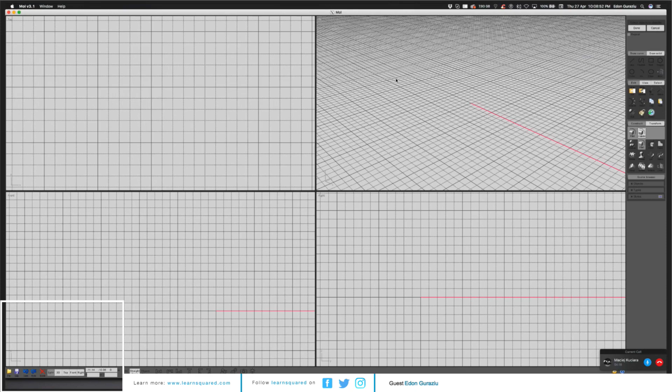What are you trying to say here? Are you trying to say you have to have an operating system to install an application? That is insane. What kind of claims are you trying to push here, dude? Listen, wait, there's more. Oh no, there's more. Are you serious?

All right, I want to know. Basically dude, what you do is like the way I do things in general, right? If I'm introduced to something new - and back in the day it was like MoI, I never heard of it - I installed it, and the license was cheap as fuck by the way, so I instantly bought it. No need for piracy, let's get that clean.

And basically, you start screwing around a little bit in the program, and if there's something you don't know, what do you do? You don't go to other artists and be like 'hey, what is the magic website or magic resource I can use?' Huh? No, dude. No, you got to do it the hard way, man.

So you go to YouTube, or you go to any forum or website, and you Google it. Or is it too complicated? I know man, but listen, hang on - okay, I want to know, I want to know. Like, let's say you can't figure out the filleting, right, or the chamfering - you fucking Google that shit. You find a couple of videos, you watch it, you try and apply it to yourself, and you have learned something that'll stay with you forever.

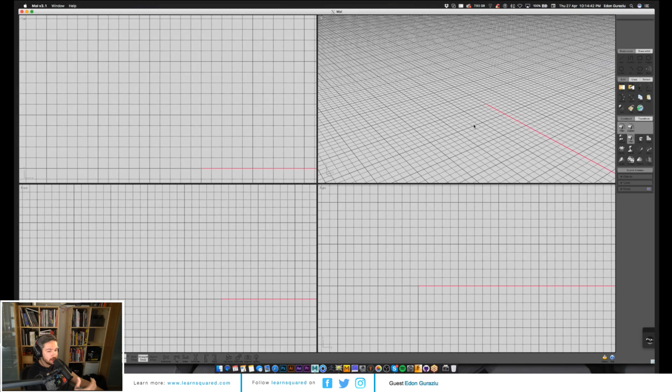So those things are very easy, but then the more complicated things you want to do, the more effort they take. If you want to do some really complex operations on your solids - like some cool shapes, bend, or whatever elaborate way of modifying the surfaces you already have - it takes a lot of brain power and clicks to get there, you know what I mean? And there's always some small thing hidden here and there, but it's not like there's a hidden tool that I don't even know about.

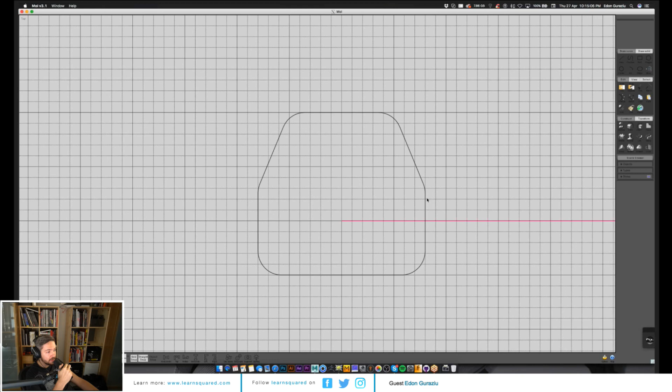Compared to MoI, it's exactly the opposite. On the surface, easy things seem convoluted and fucked up. It's convoluted to start and understand - it's almost like feeling like you're starting with ZBrush, basically.

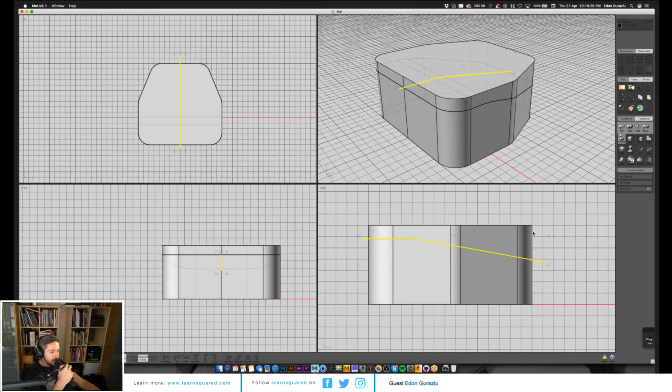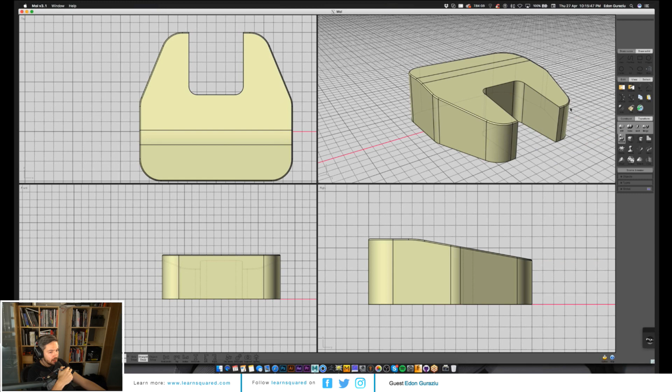And you don't even know what the hell is going on, right? Dude, it's crazy. But then you realize there are actually shortcuts you can script, and you can pretty much shortcut almost every single operation. Like, almost if not everything can be a shortcut.

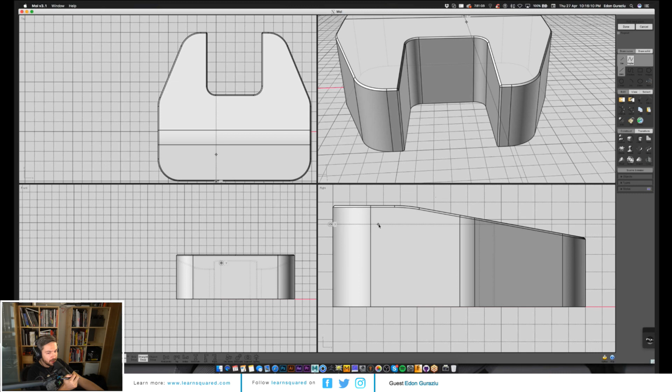I was having an interesting discussion, and we had Vitali on one of the last streams, and I had an interesting conversation because I asked him a couple of questions. He said, 'Hey, if you right click, it's like enter.' I'm like, are you shitting me, dude? Why is it not written anywhere? Like, nowhere is it written. Some things are not communicated.

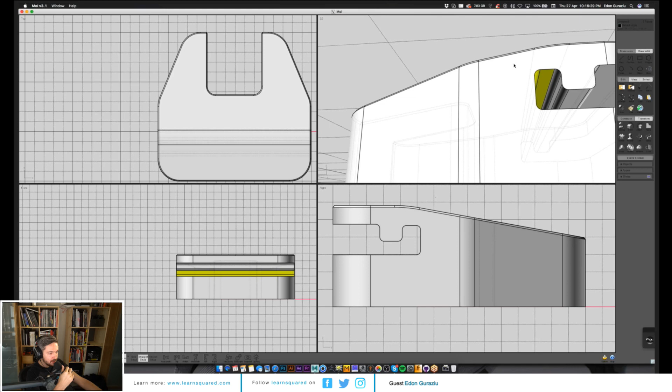Yeah, and like I asked you about shortcuts. You sent me a list of shortcuts, and that's pretty easy to find. But I've quickly found out that some of the operation names displayed on the UI are completely different than the script itself, like the script that you have to put in to tell people, okay, this is...

Yeah, it's easy, but then for instance, flow is the easy one, but there were some scripts you have to manually put in, etc. But like mirror, you can assign any key you want, like Command F or whatever, you know. That's great, yeah.

Exactly. But for instance, if you go to - I can't remember what it was, I think it was freeform constraint curve, or through points. Through points is an interesting one - it's not actually called through points, it's called curve constraint or something like that, which is a completely different name to what you see in the UI. And that's the confusing part.

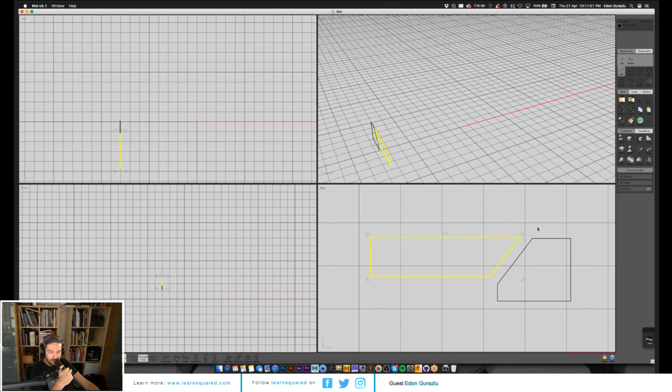Have you ever used Flow? I don't think so, dude. Oh, see, there you have it, I know something you don't know. Oh, really? God, damn, that's fine. So Flow - you know what the FFD box is, right? Of course. So Flow is that, but it's working in one dimension. So you basically, the way you do it...

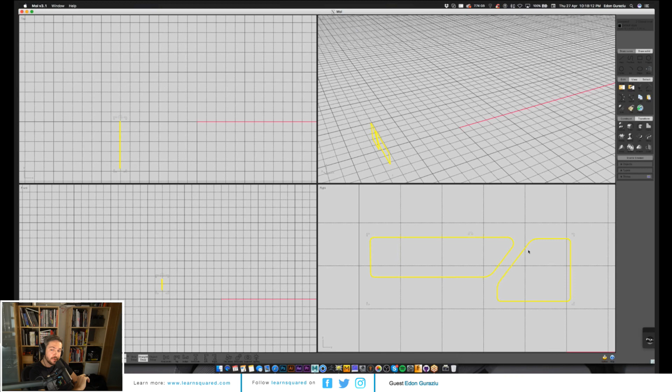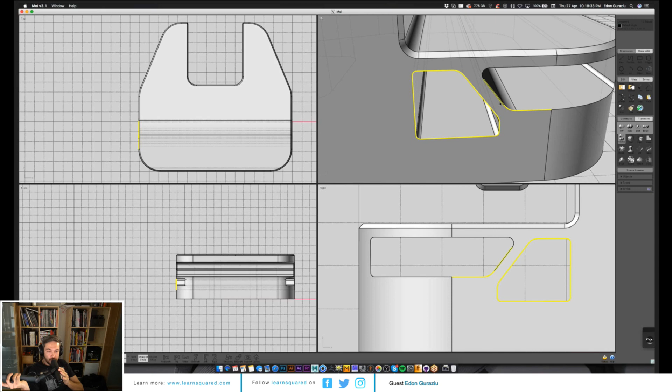So for instance, you have this model right now that you're working on. Go to it, now I'll show you. See, I teach Edon. Like, what the fuck? Teach me, yeah, I'll teach you. I think it's called polygon, not rectangle - it's a polygon. In one of the views you just have to draw the polygon behind. I'll maybe share my screen and show it. Yeah, please share yours so I can see it. Let's just do that, that's gonna be easier.

I need to find my mouse on the screen. Alrighty then, can you see my screen, dude? Yes, perfect. Let's make sure that people can see it too.

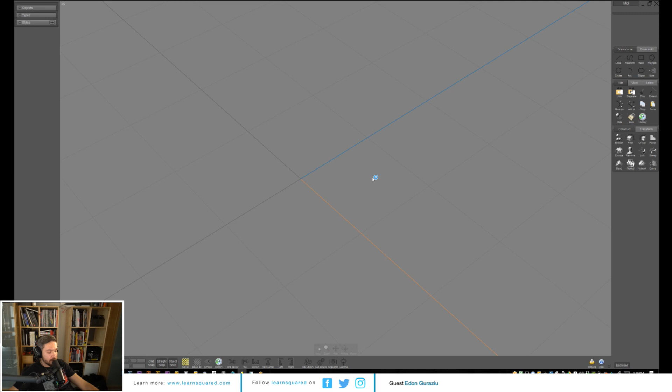So my UI looks different. I actually want to talk to you about UI, that's another topic. I was bugging you and you were telling me, hey, there's millions of scripts and plugins that you can find. I went with Chip Walters, I believe, yeah, the man. I'll maybe pull up this channel on YouTube that he has in the meantime, because someone might ask, hey, how do you set up your UI and whatnot? So guys, if you go here - if you go to this channel, it's called Chip Walters, CWALTERS56.

So, go to playlists. He actually has 3D code, some small tutorials which are pretty cool. He explains how to set up your Moi, your shortcuts, and your custom UI. If you dig deep enough, you'll find exactly what to do. He also has his own application that he's built, a GUI builder, and you can use that to set up your own colors for pretty much anything in Moi. That's a really good resource. I'm gonna paste in that link, and he teaches basics in his videos too. So go ahead, use that link, and it will teach you what to do.

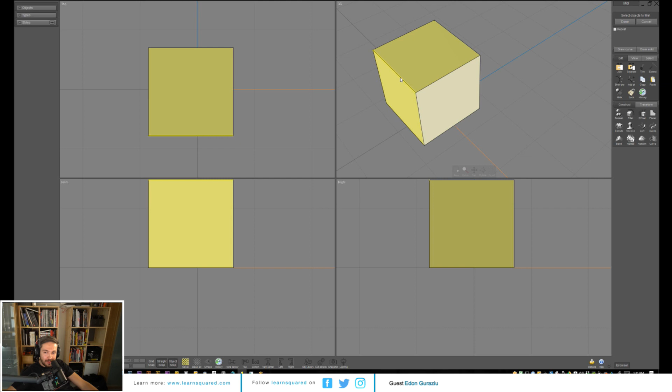Just do a little fillet. Like this should be good enough for us. Another thing is, if you right click again, it repeats the same operation that you did before. Very good, which is great.

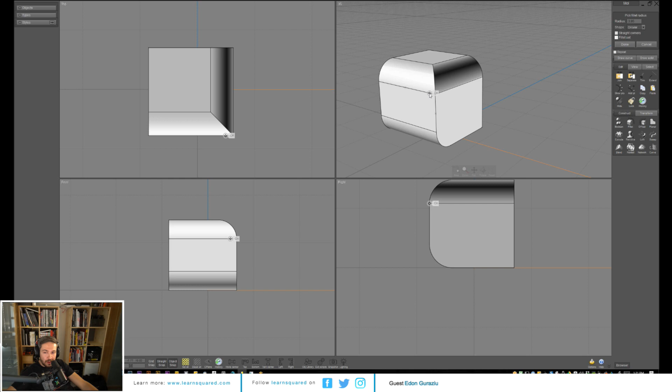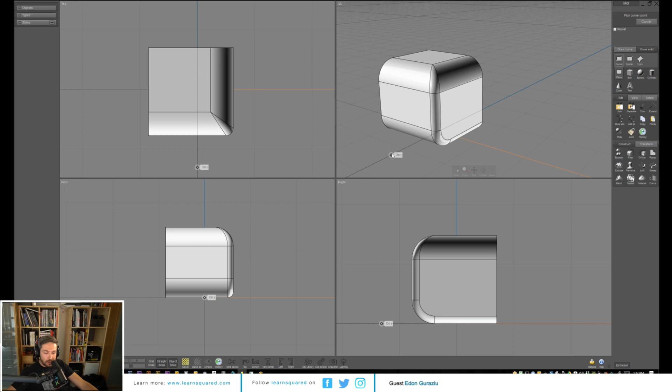All right, so I've created this object here, right? So what you do is go to draw solid, plane. I think it was plane, corner to corner. So you draw something like this behind it, right? And then you take it and copy and paste, so you have a next one here.

Then you go to construct, or transformation, no - here, in edit, add points. And when you hover on the surface, it shows you different points. So you click it, and then you can select those points and move around, basically deform the surface. So we did this weird deformation right here.

And so the way flow works, it's basically based on the axis of those two surfaces. It will try to deform the object, and that could be your whole assembly even. So this is great. If you go to deform flow, you click the object, right click to confirm the selection.

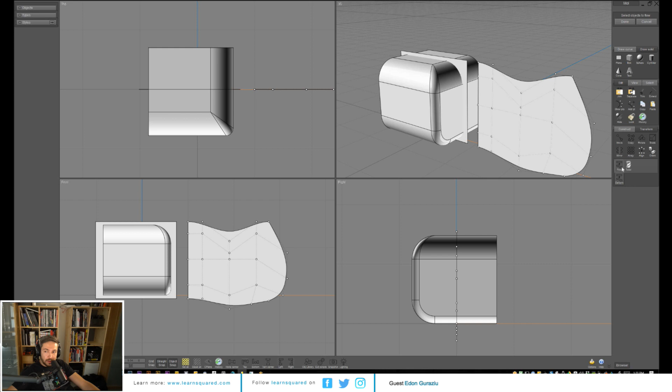And then here's an important step, and I was struggling with that, so Vitaly showed me how to do it. And then I tried to do it, and it just didn't work. So I pinged him again, like, hey, how do you do it? And he said it's very important - you have to do this and that.

Where you click your mouse is very important. It doesn't matter where you click the first time, but you have to click on that surface behind it, the one we just drew. So if I click right here in this corner, that means the next time I click to confirm the surface I want to map to has to be a similar corner. Otherwise, it will flip it or do weird stuff.

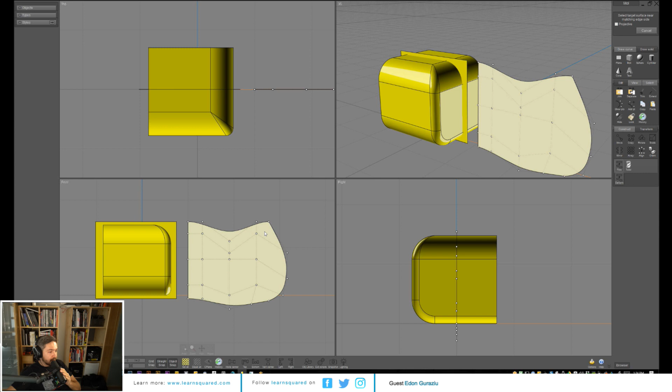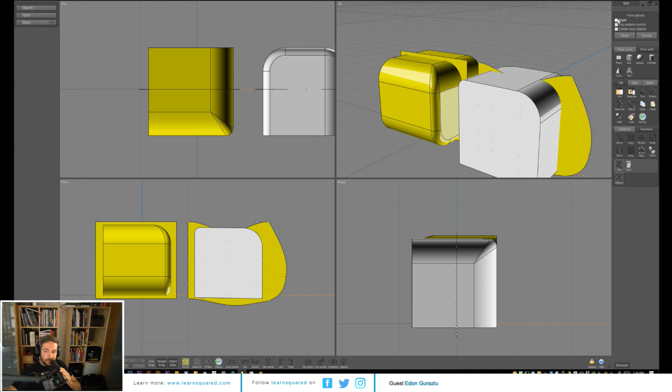So if I... you see what happens? Now this object that I've created became this bent, cool looking surface that is basically following the deformation of that box that I've created. And then you just confirm. But also you can make it rigid, which lets you create a lot of stuff like that. You can flip the surface normals, and you can also delete the old one. So that's something you don't even know exists.

And that's my major gripe, major issue with Moi so far. There's so much good stuff that you don't even know exists. But either way, I oftentimes run into issues, and I want to show you something that is driving me crazy, and I want to know if you have a solution for it.

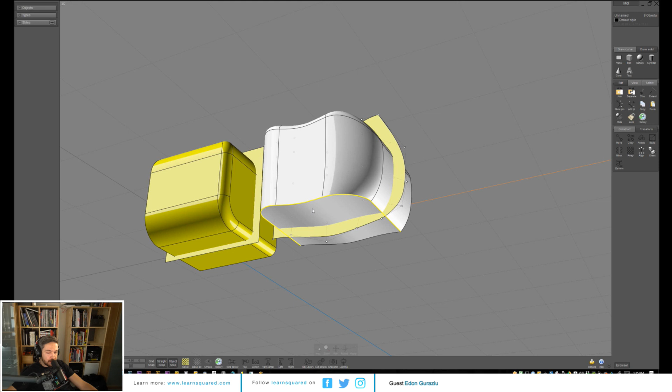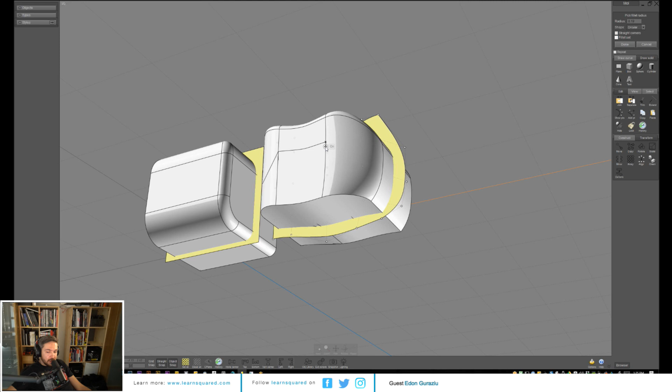Okay, I gotta look at your screen a bit more carefully there. All right, so what I'm doing here is basically selecting the curve, right? I'm pressing F, which is my shortcut for the fillet, and the way fillets work here in Moi, you click, and then you click the distance, and it just defines the distance. So if you go for too large of a distance, then you get this, and this is crazy annoying. And then how do you deal with that? Because that can happen depending on how complicated your surface is.

It can happen straight away, regardless of how large a fillet you want to do. So if I do a small fillet like this, it will work. But as soon as I want to do a bigger one, it just breaks, and I don't know how to deal with that.

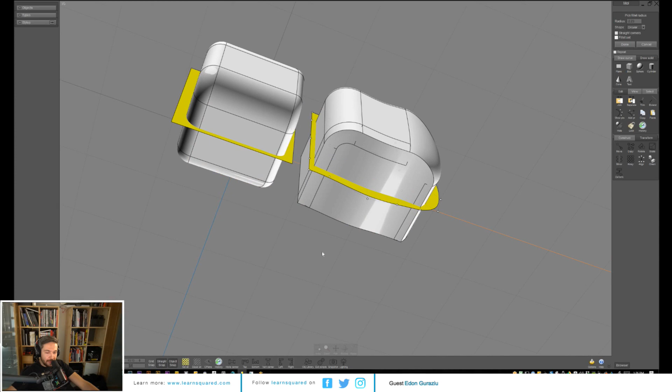Well, you're out of luck because everyone experiences the same thing. There are a couple of things you can do to ensure bevels go the right way, but generally, the radius from the top view of the corner is also very important.

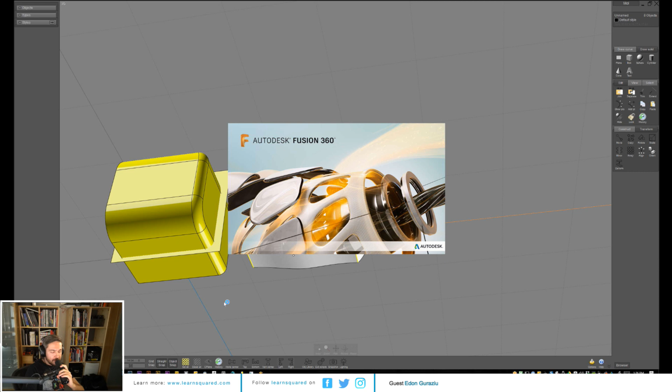Let's say you have a very big radius in your fillet at the corner of a cube. What the radius will do is make it circular. So half of that radius distance will go inwards horizontally, and half will go down vertically.

So if the radius is too small, it can't make the bend at the corner. We're talking about this inner corner basically. Exactly, and maybe I can even demonstrate it if you go back to my screen.

I will. Good, so I can show you guys what's up. And then all of a sudden it works, that would be funny. There you have it, it's all yours, baby.

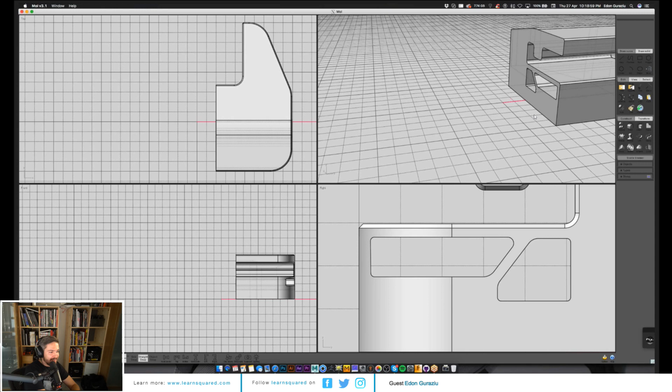Nice, so you can see, if I bevel... yeah, like a huge bevel like this would be super easy to do at a large size too, you see? Because the distance to the opposite side is large enough to support this transformation.

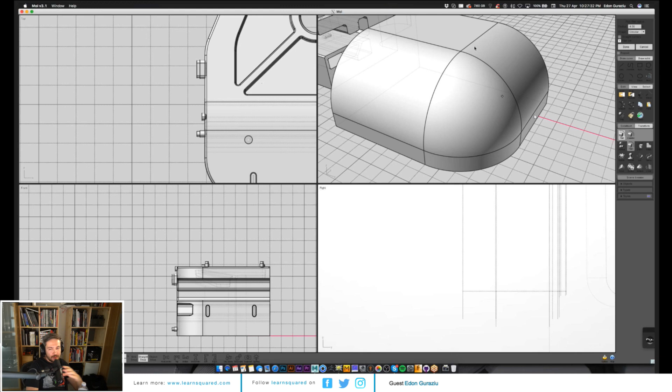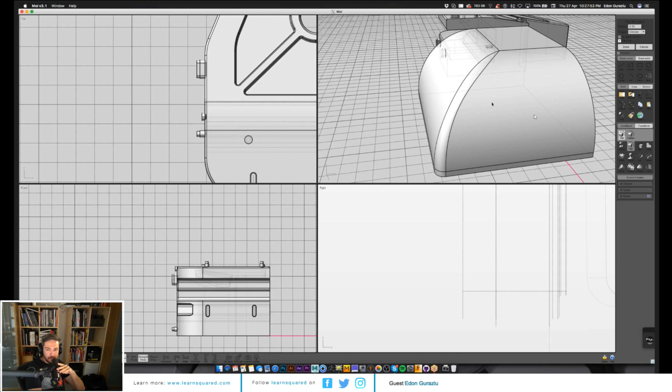But if I made this fillet really small and used the same bevel size, at one point it won't work anymore. I think it works fine on straight surfaces, so it seems to work better when you have more straight surfaces, and it breaks apart when you have curved surfaces.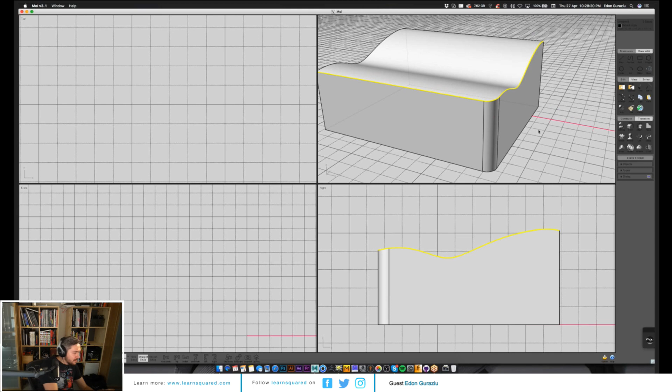Let's even use a sketch and make a crazy shape to simulate maybe a little better what you had. Because right now it's not a flat corner, it has to do the bevel on all the angles. A sphere doesn't really have a corner, so it doesn't have a calculation point to stop—it's vectorized, so it has to create tons of calculations on each curve.

So when we do the same thing, all of a sudden it works. But yeah, you see it's freaking out—it can't support the bevel size going inwards on this surface. So that's kind of the thing you have to deal with.

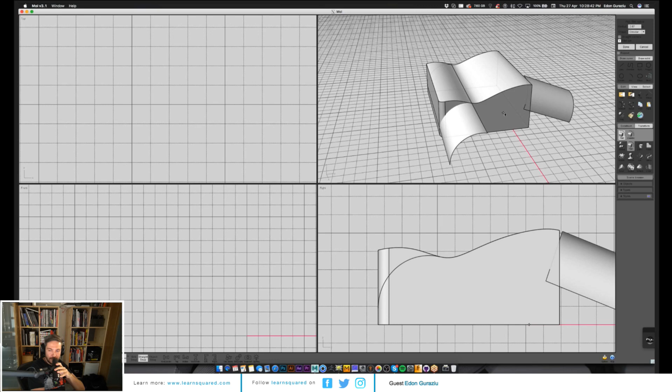And if you need that shape so badly, you can just go into ZBrush and poly model it, which is another point I want to make. If you really want a crazy shape, right?

We can go to Maya and create a sub-D model here real quick. Let me just create something very basic here and sub-D it. Now if I export the selection, I'll just go to cube.

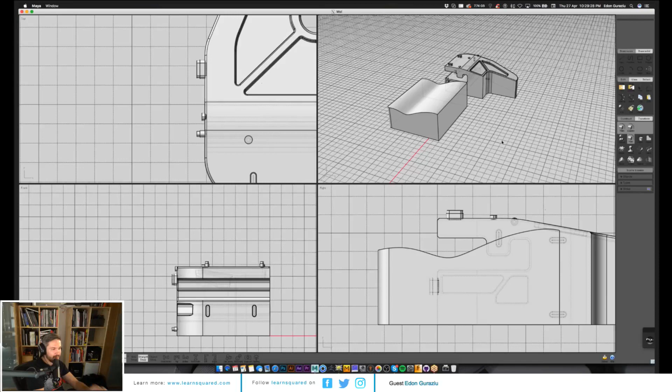One of the cool scripts that I have is this import OBJ script. So you could do your crazy organic shapes in quads first in Maya, and you have to be sure that it has quads and not triangles, because otherwise it's not going to work, right?

So the import OBJ script will go to desktop. We have the cube, and it'll import it here. You can see that this is the original mesh, because the way Moi does the smoothing is the same way Maya does the OBJ smoothing script.

So let me just subdivide it—subdiv, yeah, and you can even select the level of subdivision. It's using the same thing that Rhino is using. Yeah, exactly, because the creator is the same—it's Michael Gibson, he also created Rhino. So it's probably the reason why it's also incorporated in here.

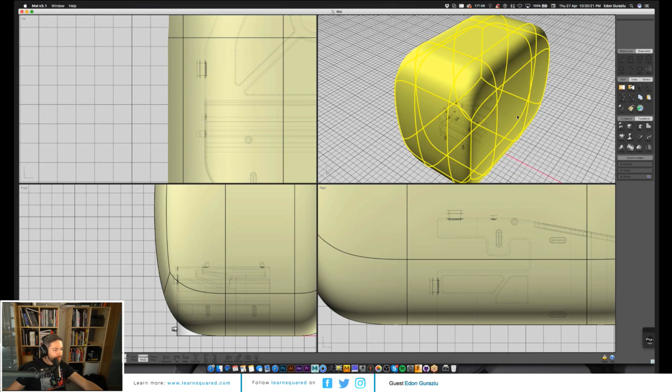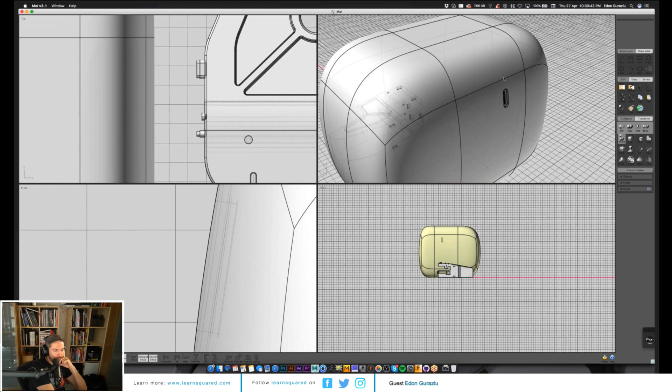But the funny thing is, you can have complicated shapes and just go in and put a boolean in here, and move it into the surface. Let's go to the side view and do whatever you need to do. So we make a boolean, and you have an organic shape that has the CAD sharpness to it, which is a great tool if you need more organic shapes. And right now, if I would export it, the export selections or export capabilities are also super cool.

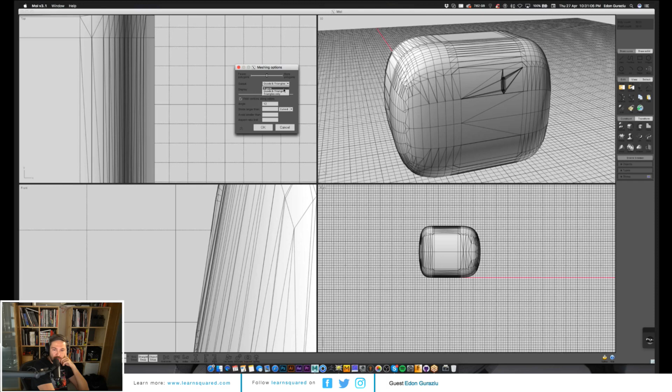So if I go to like a Wavefront OBJ, you can see the level at which it exports, and you can make it n-gons and do the conversion later in Maya or whatever package you have, or triangles only, and select the level of tessellation.

Dude, I love this program, man, because it does everything you need, right?

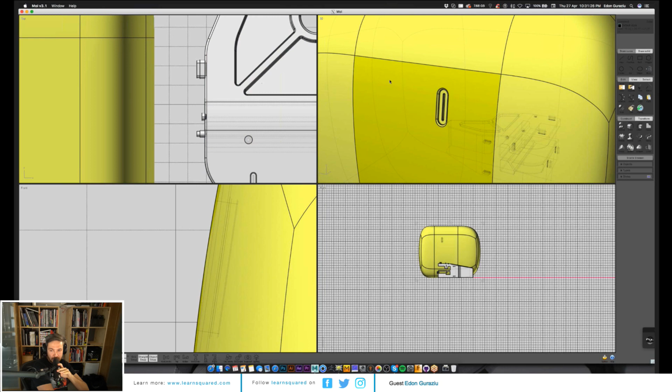Yeah, 3ds Max has the ability to actually import CAD files straight from the CAD format, and then you can do the same conversion inside 3ds Max. You have a little more options, but if you're not using 3ds Max, then you're out of luck, and this is a much better solution.

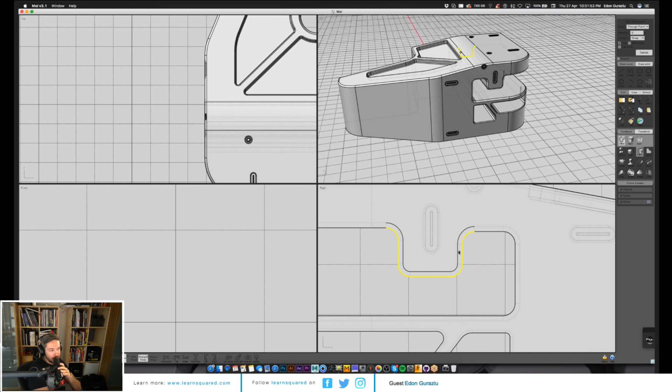So I know, for instance, in Fusion 360 you have to use Mesh Mixer, so that's always an option too. You would get your IGS or step file, and then you would just open it up in Mesh Mixer. So I think that's what's up.

Let me see. Just gonna remove a little bit of volume from our stream, it seems like the audio might be clipping a little bit. But yeah, things like that are really frustrating.

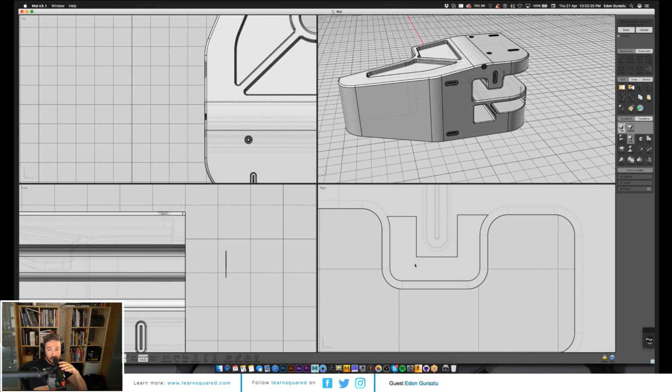Let me maybe show you my screen again. I'm gonna have a couple more questions, and maybe they'll appear better if I present my screen to you, and then you'll see exactly what I'm talking about. Sure, go ahead, when I'm doing it in Fusion.

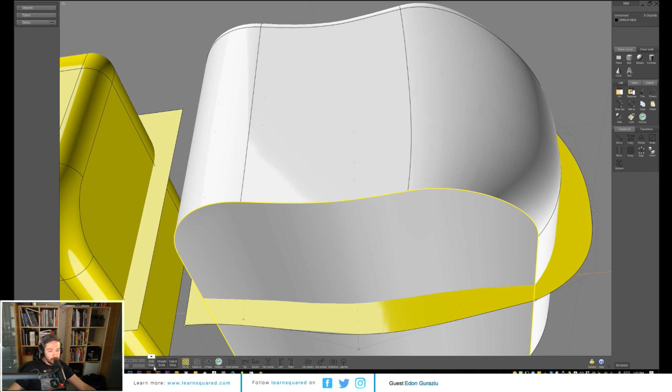So you asked about Fusion's ability for shortcuts. They don't have shortcuts, and I've been drilling Curtis Chan, who's the Autodesk Fusion 360 evangelist, a really cool guy, frequent guest on our streams. He's actually gonna come back really soon to join us. We've been drilling him about shortcuts, and I know they're working on it, because the way they've built the whole system, I think they've mentioned the ability to override what they've already built isn't there, so they have to build a subsystem that allows you to override specific keys and shortcuts and whatnot.

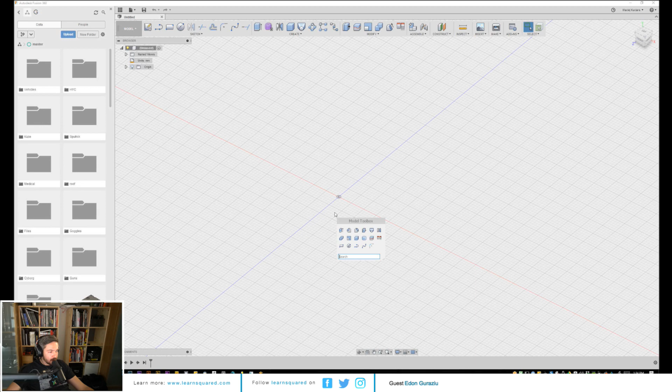But in terms of what they added, which is very handy, is this little toolbox which you can customize. It's very similar to Rhino's command tool or command search. You start typing and get all the commands with that letter, then you can choose - let's say if I already have loft, but I want ellipse too, I press this little arrow and it adds it to the toolbox. If I want to remove it, I find the icon here, press X, and it gets removed. If I want to move things around, I can move them directly in the toolbox. It's under the S key, so if you memorize the major tools you use most, you can just press S and click, and that makes everything work.

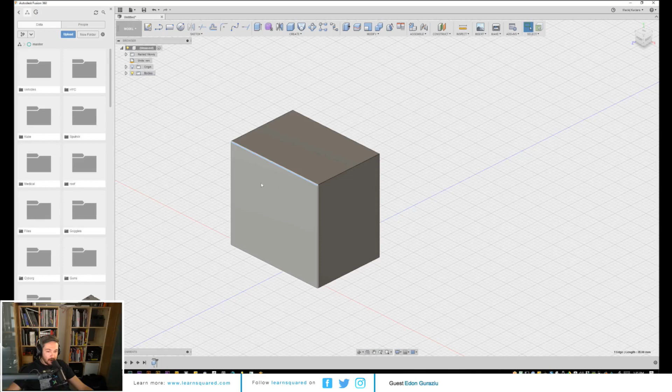So if I create a box, you see I already have options to work with it. One of the things I like about Fusion compared to Moi - and I'm curious if Moi has this ability - is when you select the edge and start doing a fillet, you get a little pop-up with all the settings and parameters.

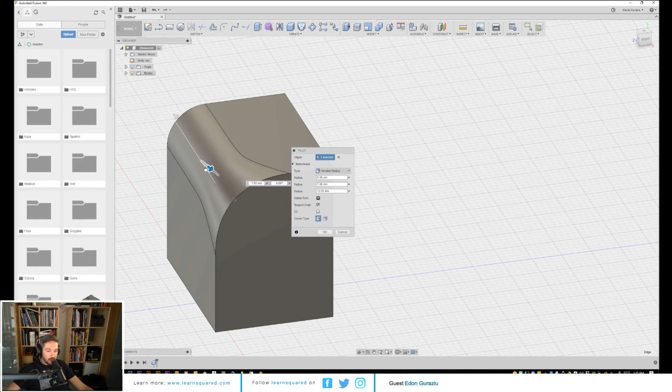You can see in real time what you're doing and choose the right radius that works for you. And if you want variable fillets, you can do that as well, and see it update. You can also add more points, which lets you really bend the surfaces the way you like. I love how Fusion does this - that's one of the cool things. I'm creating these surfaces.

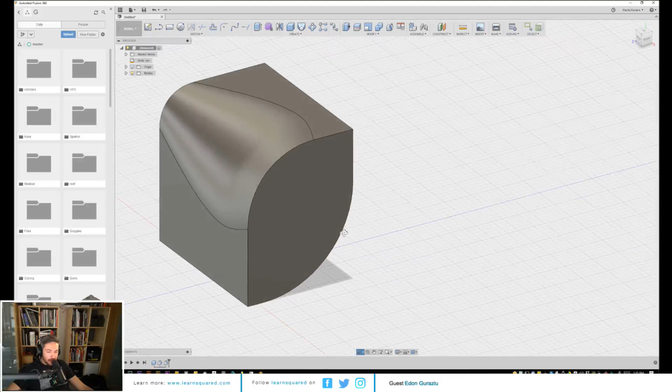One of the things I really want to know - my first question - is does Moi allow me to select an edge for filleting using a tangent chain? Basically, if the line is continuous, can it select the whole thing, or is it just going to select one thing?

By default, it's on. But if you want to select only a few and not include the tangent chain, you can do that as well. But it loops right away - it's enabling a loop immediately.

I wonder if Moi has that. I'm curious. See, I had this deselected and I selected this one, which should possibly be a loop, and it just didn't add it. But now, if I have it selected, it adds it.

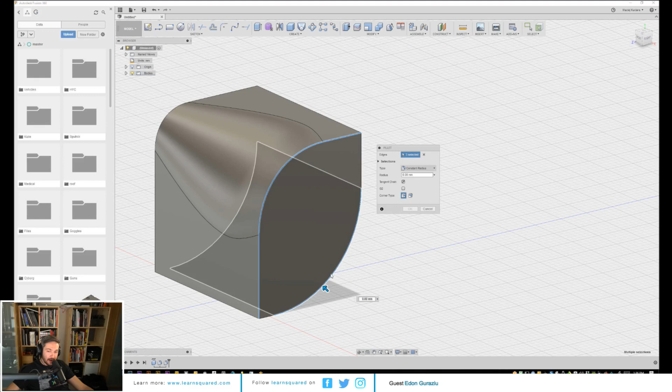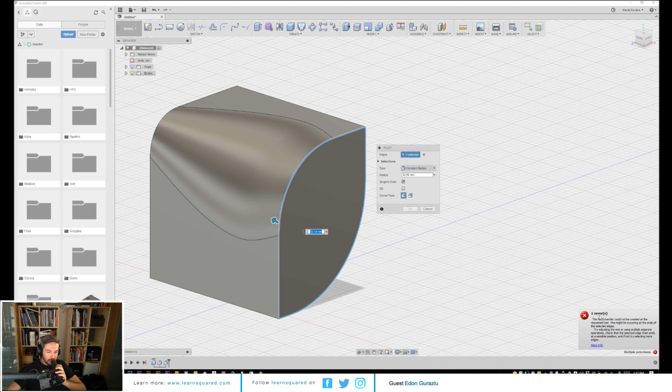Now you can do something crazy - you see it breaks at some point, but it still allows you to keep going. And if you're going too far or something's not working, it pushes back and gives you an error message. It says you cannot do it, so you push it back down and it jumps around. But at least you're seeing what the end result is.

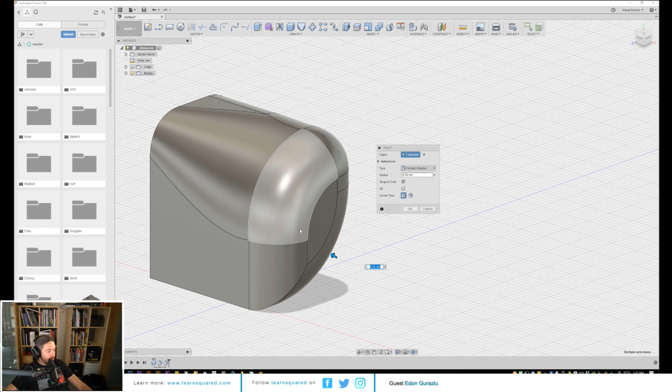So that's one of the things I wish was in Moi. I know Moi, by definition, was designed and built to be as stripped down and simple as possible, so people can customize it the way they like it. I know that, and that's a good thing.

But again, if I go back to Moi and did this little thing here - Moi doesn't have that, and you can do crazy, crazy stuff. Fusion supports some really cool calculations. But I never really found myself in a situation to create such a shape.

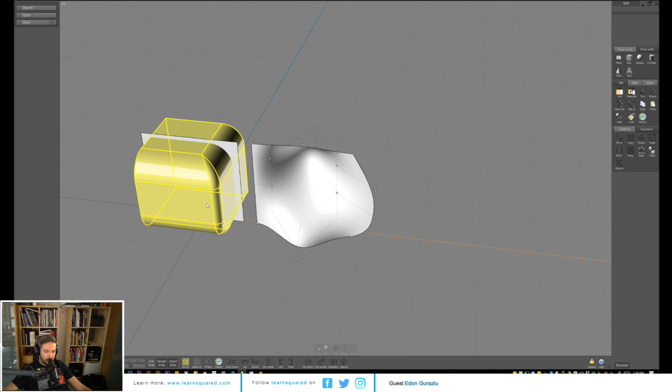I don't know why not, but only very few times have I had disappointment or been unhappy about what Moi was incapable of. But it's very cool how Fusion calculates these surfaces you just showed, and I wish they were here too.

But the cool thing is I had correspondence with Michael Gibson, the creator of Moi. I speak with him from time to time to check in on his progress with V4, the new Moi. He said he's working on the viewport, and as soon as that's done, he'll release an open beta.

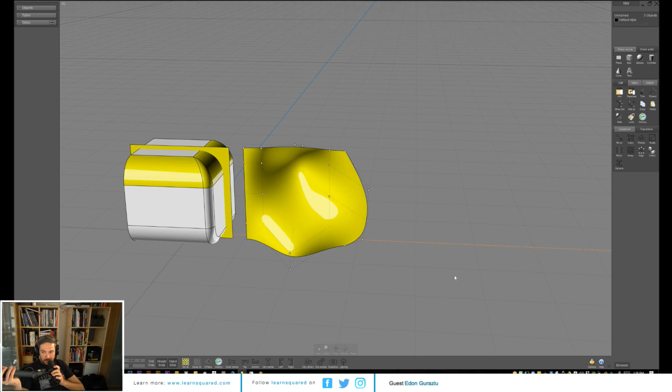So I'm very excited to see the 64-bit architecture and all the new stuff being implemented, which I think will be a crazy release because the performance boost will be huge, and all the new features included are going to be very nice. I'm very curious to see.

And this is one man against hundreds, of course - people in a Fusion department. Let's just imagine that.

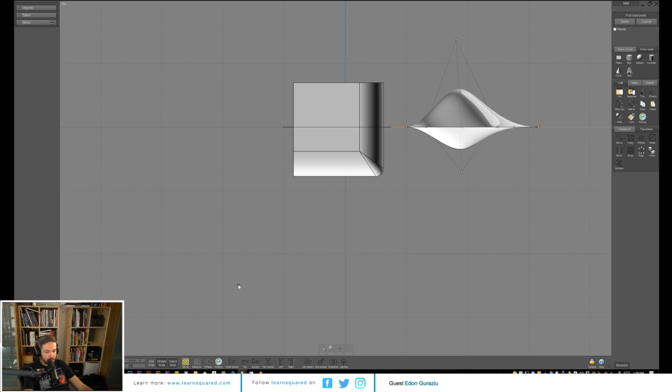Let's be clear, I love it so far, apart from those quirky things that are horribly annoying. I like it, don't get me wrong. And one of the things I find extremely useful is, let's say I have this surface right here.

Let's actually shell it. I can't remember - I have so many shortcuts, I can't remember them yet. But let's shell it.

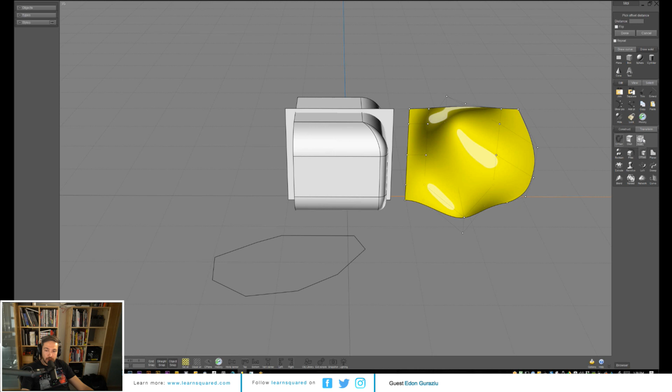Do you work with a tablet or the mouse? Tablet.

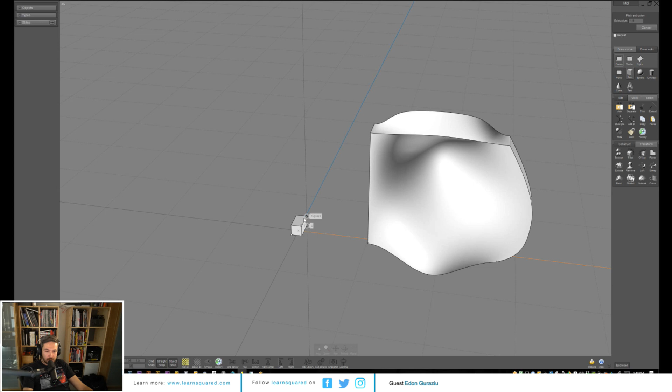So I have this surface. The really cool thing is, let me delete this stuff here and let me create something really quick. I'm much slower, of course, but I like the sketch thing here, which is great.

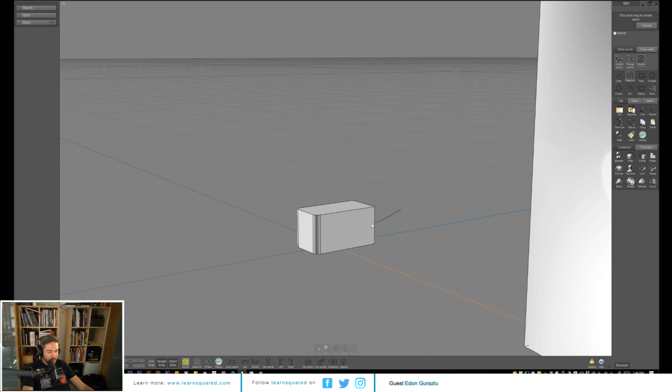You don't like using the orthographic setup, switching between views? No, honestly, so you do all your work in the 3D view? I actually do change the views every now and then. I like the rotation stuff too - it's very intuitive.

But yeah, what I wanted to do - okay, so I wanted to basically trim this.

Wow, I did a big operation here. What the fuck?

Ah, see, it's when you're stupid and you don't know what you're doing. That's exactly what happens when you're learning and it doesn't work, and you're slow as fuck. That's what's up. That's not a race, dude.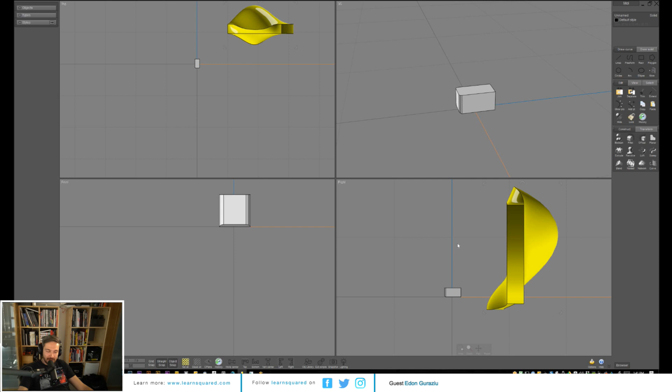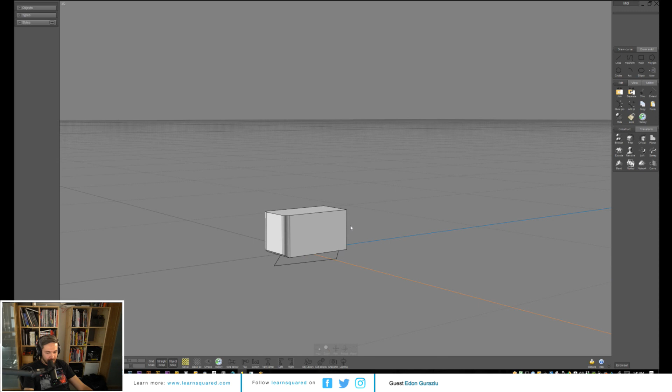I know, but the way I look at it is, speed is important because work. Yeah, that's true, but speed is definitely a good thing to work towards. Develop a good workflow and have your tricks and get the job done as fast as possible because it'll save you time and the client's.

So don't rush learning. Get the fundamentals down properly and it'll go from there. So what I like about this - this is great for kitbashing. That's a feature that Fusion doesn't have at all.

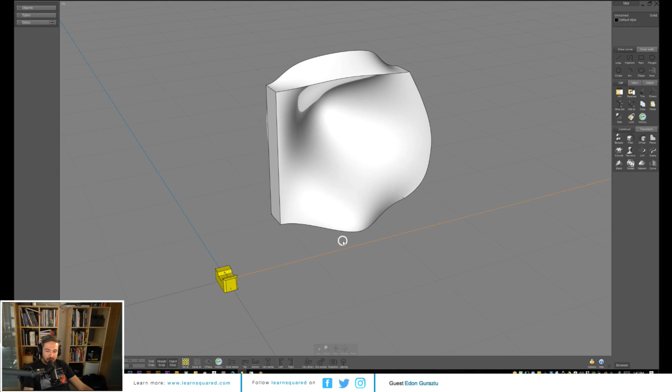So let's say I have this model right here, this little thingy here. Tell us a bit more about this kitbash you're speaking of. Yeah, let's talk about that. So if I Control C, which is copying this model, and Control V will just paste it in place.

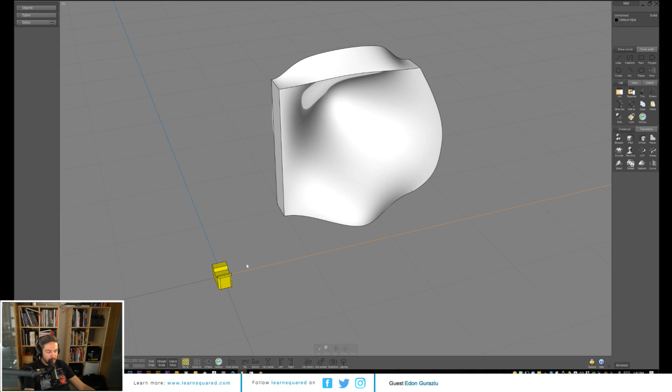But if I Control C and then Control Shift V, then I can basically place it on the surface, which is awesome. Do you use the snap? Right click once to basically confirm it, and then right click a second time to add another one. So then you can add those detail bits.

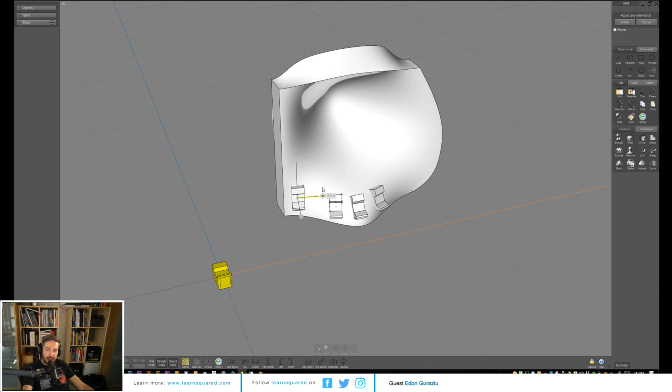Yeah, everywhere. Can you show that example? Which one? Do you see my screen? Yeah, I'm seeing it, dude. Look at that shit. Nice, there you go. And so then it's all you have - following the surface perfectly.

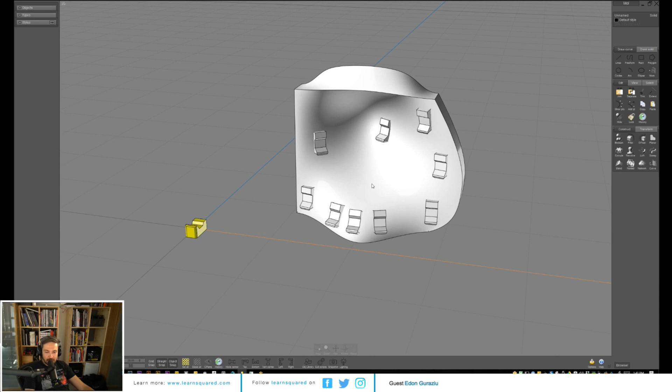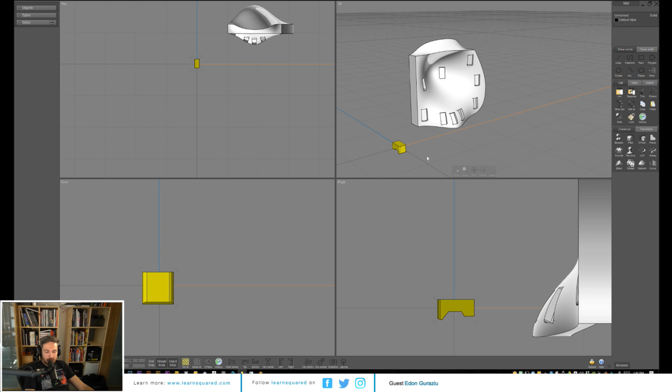Did you use that already? Yeah, well, sometimes I like to place them manually instead of dragging them around and having my fingers pushed on the keyboard constantly. But this is a very good tool, especially on curved surfaces, because it's hard to get the angle right. It's important that it sits in the middle though, right in the middle of the grid. This is nice.

So then you can just - this is something that I found immediately for me, if I build everything pretty much in Fusion, right? Let's see. Like this is a very quick way. Whoa, did it work? What the fuck? Oh, I know what's happening.

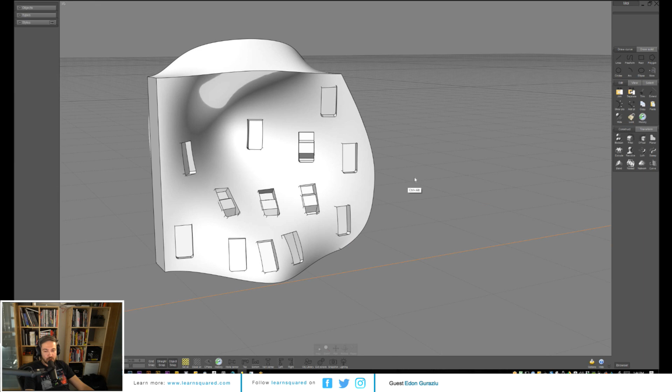There you go. This is a very quick way to add details, and it would take me much longer in Fusion to get that kind of surface detail, because you can still use align in Fusion and it works really well, but it's not as fast. This is super fast, and this is something I really like. And speed is important.

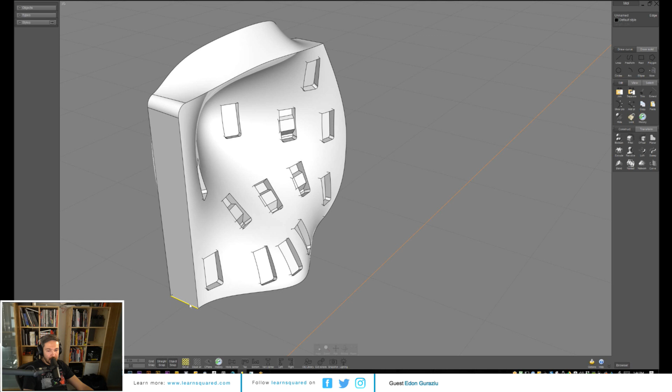As you said, sometimes you just want to get your ideas out fast. You don't want to get bogged down on the ideas when you're trying to create something, and then you're thinking about technical issues - that moment of... it's actually funny, it's a funny pun.

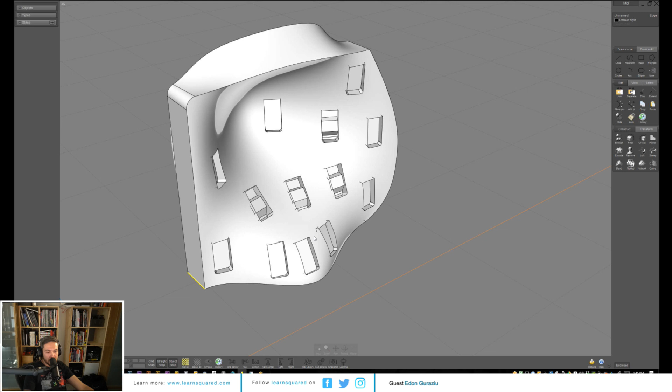That moment of inspiration goes away. Exactly, and that's what Vitali said, when I was talking with him - he mentioned that on our stream too. Yeah, I remember. It goes away. The reason why you'd want to do it in the first place is you want to speed up your process and really be free of tools to design your ideas, rather than be bogged down with stuff that's just annoying.

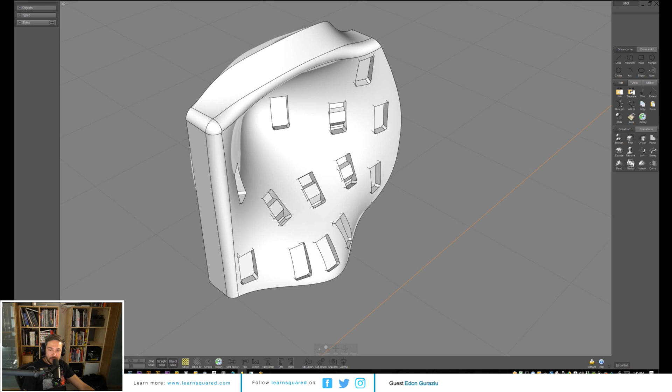So it's so true, because I left Fusion for a reason - not only because my MacBook wasn't fast enough, and I think they patched that problem already so it's running fine, but I would have an idea, I'd hop onto my PC, and I couldn't get the most simple actions going on, and that's what ruins it for me. And I know with Moi, or Maya, because I know Maya well enough through the years of learning it, but Moi is so easy to get down.

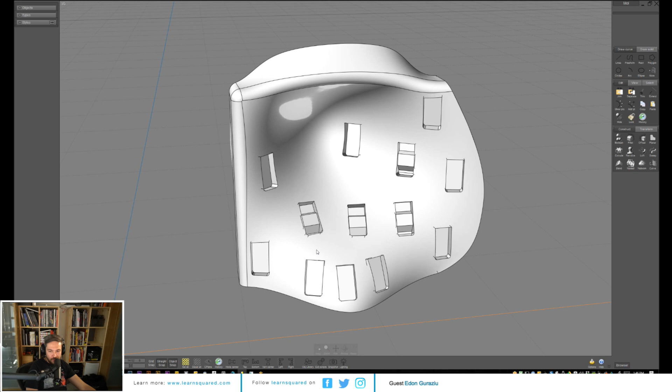I mean, the learning curve is almost nothing - it's almost like drawing on paper. It has that essence of paper and a pencil, which I love.

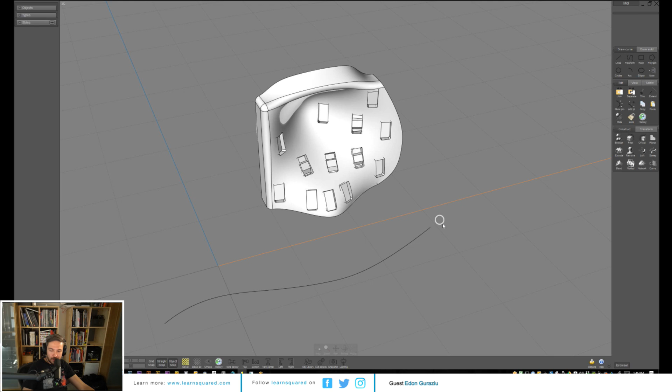Another question I would have for you is this. So let me see. I think, yeah, there we go. So this is pretty cool.